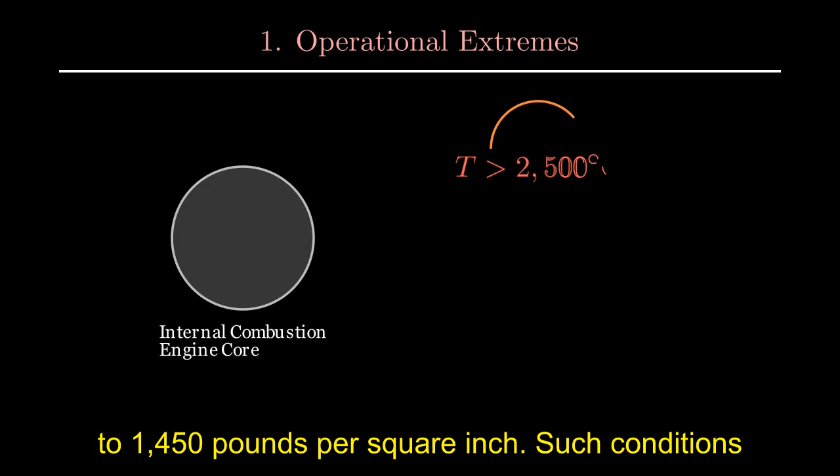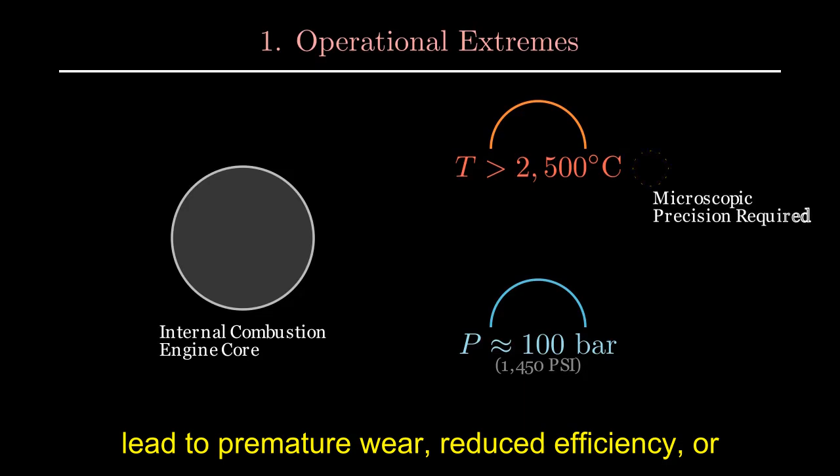The internal combustion engine, converting chemical energy into mechanical force, operates under extreme duress. Temperatures routinely exceed 2,500 degrees Celsius and pressures can reach 100 bar, equivalent to 1,450 pounds per square inch. Such conditions demand components engineered with microscopic precision. A deviation of even a few microns can lead to premature wear, reduced efficiency, or catastrophic mechanical failure. The inherent challenge lies in consistent, high-volume production, maintaining exacting tolerances across diverse manufacturing environments, day after day.

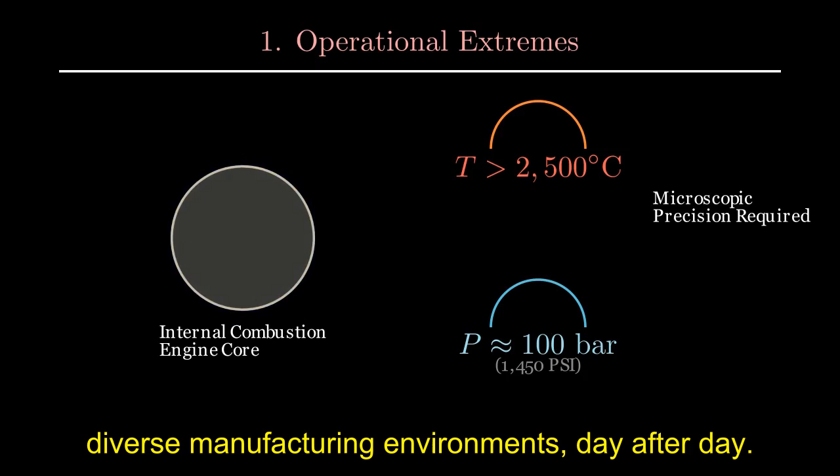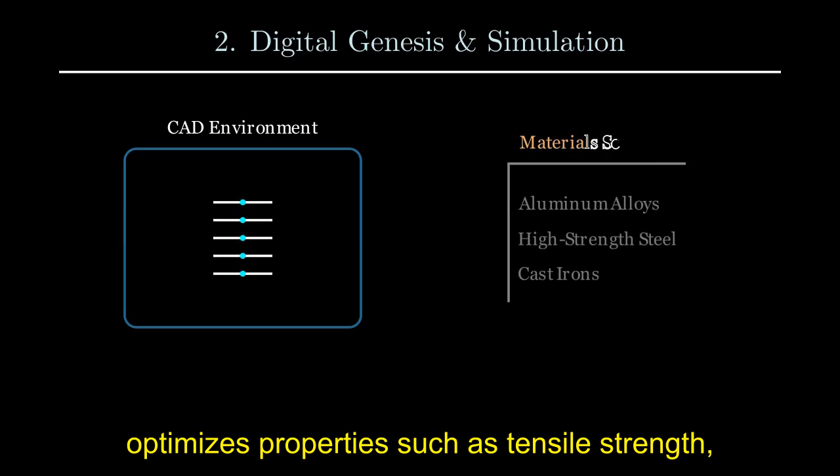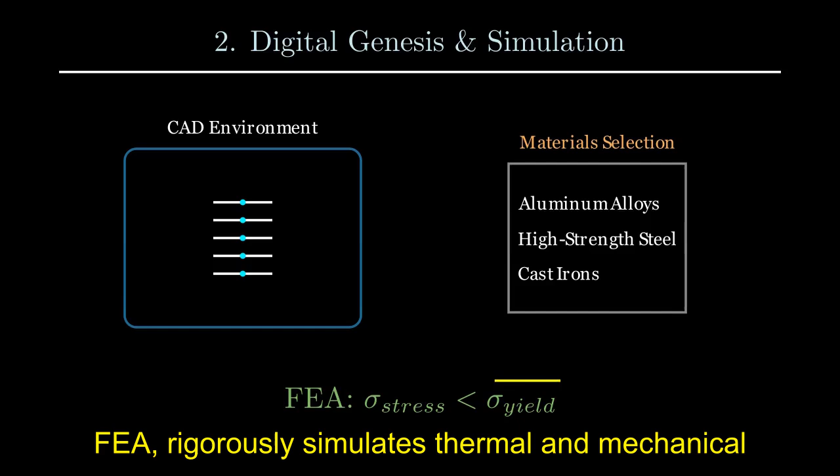The engine's existence begins digitally, long before any metal is shaped. Computer-aided design, or CAD, meticulously defines every geometric parameter of the engine block, crankshaft, and cylinder head. Material scientists perform exhaustive research, selecting specific aluminum alloys, high-strength steels, or advanced cast irons. This selection optimizes properties such as tensile strength, fatigue resistance, thermal conductivity, and overall weight reduction. Finite element analysis (FEA) rigorously simulates thermal and mechanical stresses, predicting performance and identifying potential failure points virtually, refining design before physical prototyping can begin.

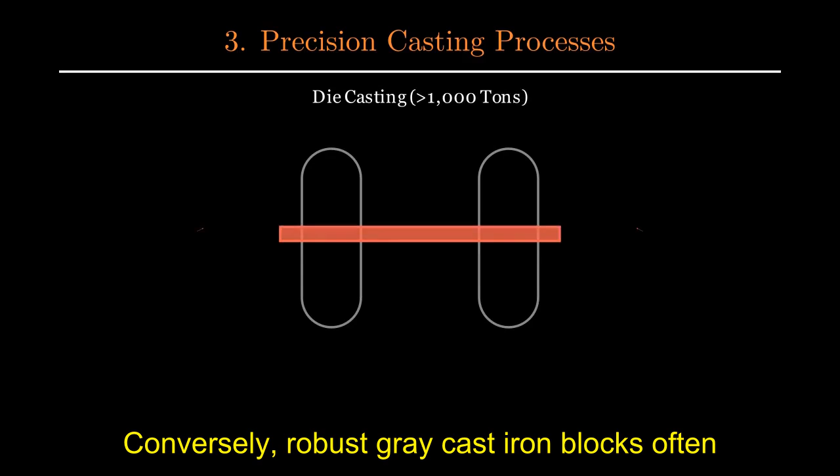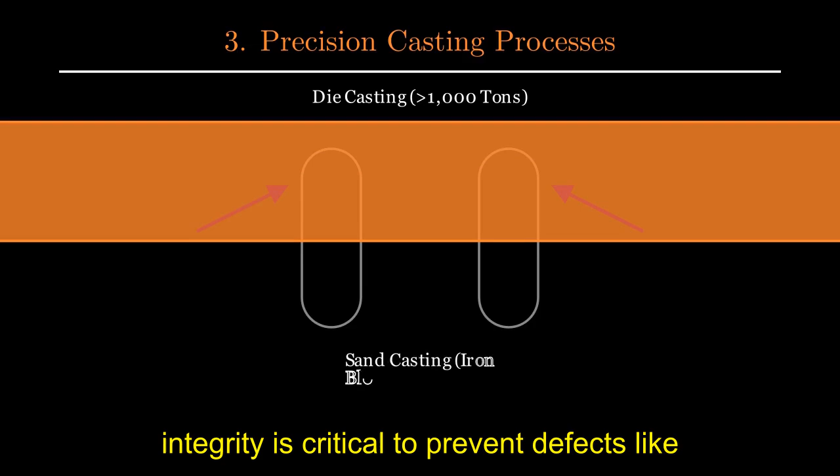The engine block, the primary structural component, typically involves precision casting. For lightweight aluminum blocks, high-pressure die casting is prevalent, injecting molten metal into elaborate steel molds under immense force, often exceeding 1,000 tons. This process facilitates complex internal geometries and thin wall sections, vital for mass optimization. Conversely, robust gray cast iron blocks often utilize sand casting, involving intricate sand cores to form internal passages. Precise control over molten metal temperature, injection speed, and mold integrity is critical to prevent defects like porosity, inclusions, or incomplete fills, which compromise structural integrity and performance.

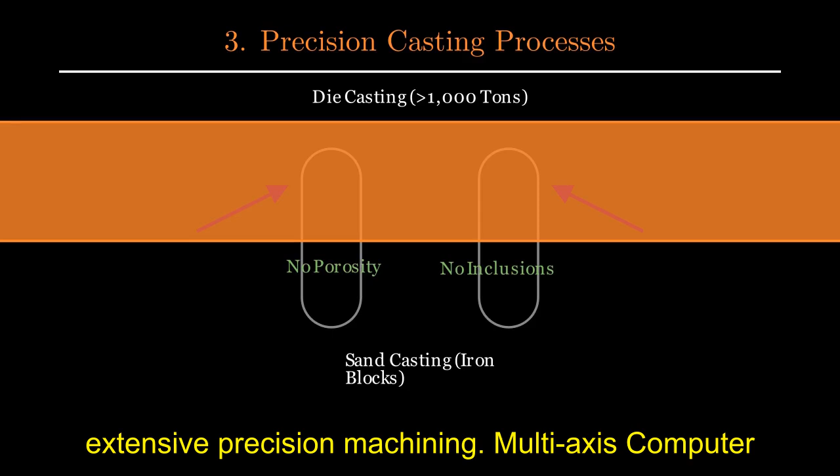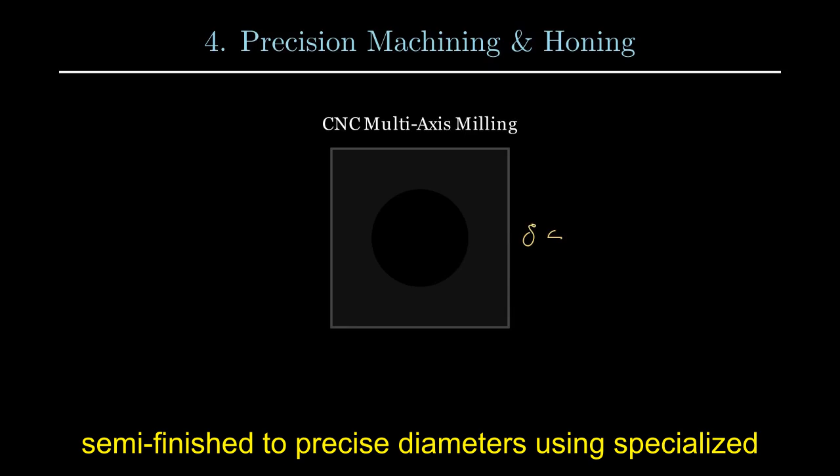Upon cooling, the cast engine block undergoes extensive precision machining. Multi-axis computer numerical control (CNC) machines perform intricate milling, boring, and drilling. Deck surfaces, where the cylinder head mounts, are milled to a flatness tolerance often within 5 to 10 microns, ensuring a perfect seal. Cylinder bores are roughed out, then semi-finished to precise diameters using specialized tooling. Robotic tool changers rapidly select from hundreds of cutting tools, executing complex sequences.

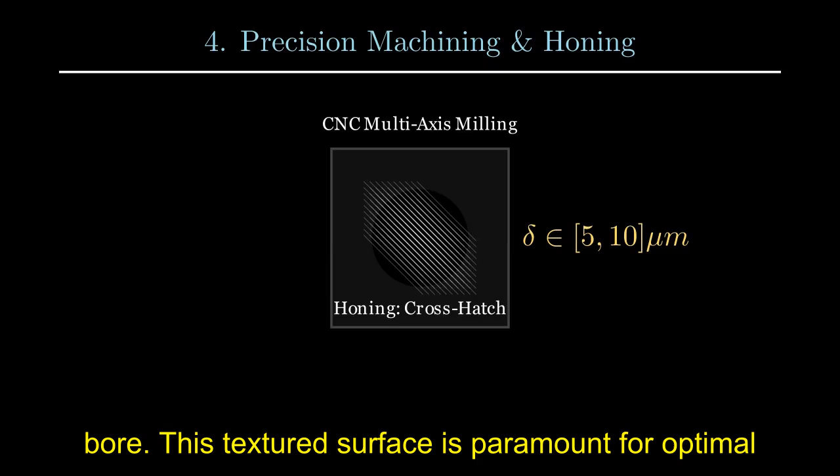Honing, the final process, creates a microscopic crosshatch pattern within each cylinder bore. This textured surface is paramount for optimal piston ring sealing, minimizing oil consumption, and ensuring long-term cylinder lubrication.

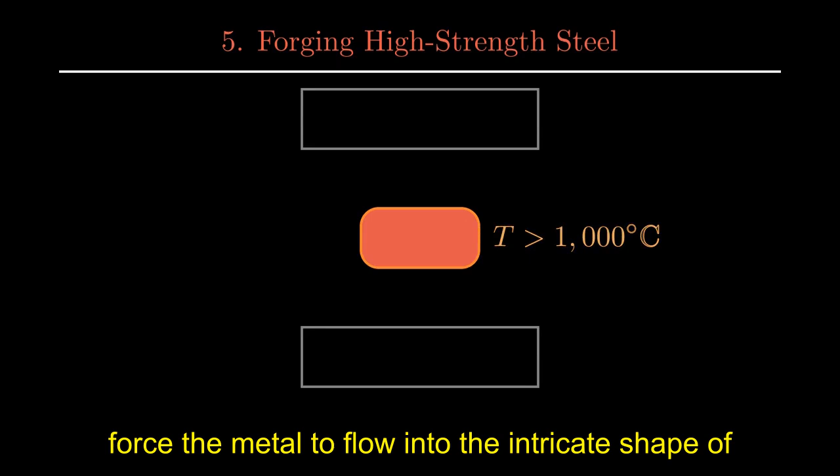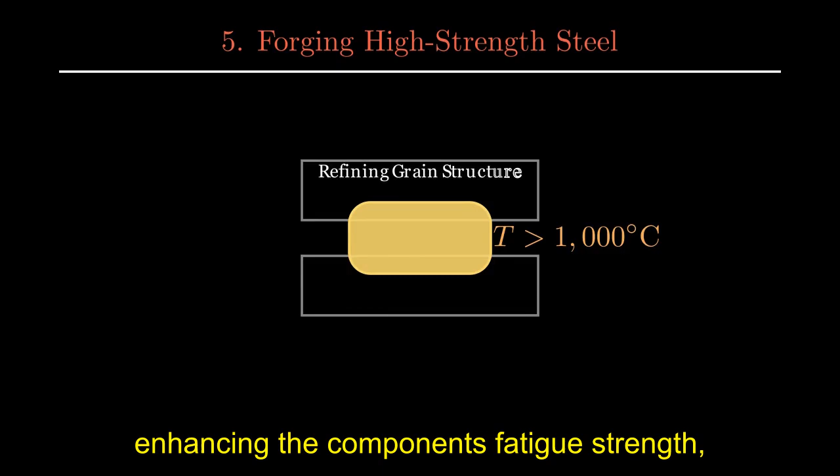The crankshaft, converting piston motion into rotational torque, must withstand enormous torsional and bending loads. It is almost universally forged from high-strength alloy steel. Heated steel billets, sometimes glowing orange at over 1,000 degrees Celsius, are strategically placed within massive hydraulic presses. Repeated, controlled impacts force the metal to flow into the intricate shape of the crankshaft. This forging process is crucial. It refines the internal grain structure of the steel, eliminating internal voids and significantly enhancing the component's fatigue strength, toughness, and overall impact resistance, properties essential for its sustained, high-stress operation.

Following forging, the crankshaft undergoes precise grinding and milling. Specialized grinding machines reduce main bearing journals and connecting rod journals to submicron tolerances, ensuring smooth rotation within the engine block. Oil passages are meticulously drilled through the shaft to lubricate bearings. Counterweights are then carefully machined to precisely balance the rotating assembly.

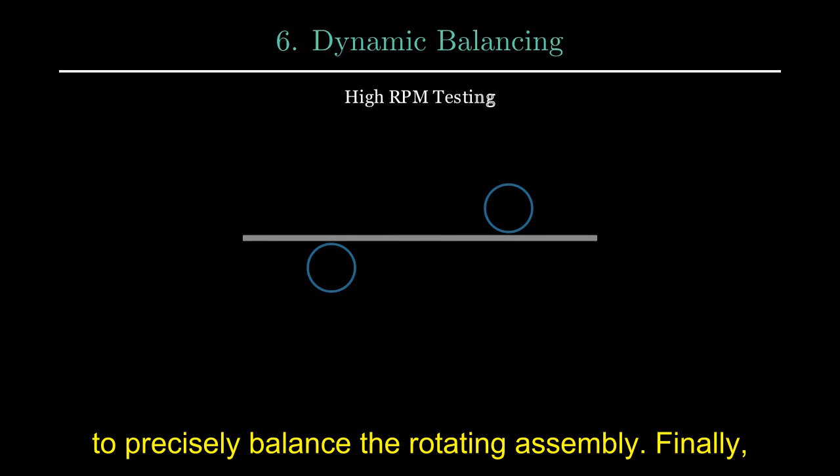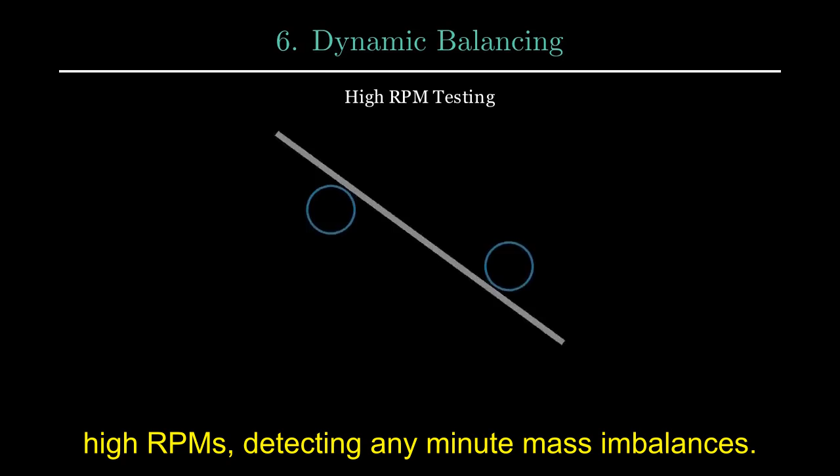Finally, each crankshaft is dynamically balanced on a dedicated machine. This machine spins the shaft at high RPMs, detecting any minute mass imbalances. Material is then precisely removed from specific counterweight locations to achieve perfect rotational equilibrium, which minimizes vibration and ensures smooth, long-term engine operation.

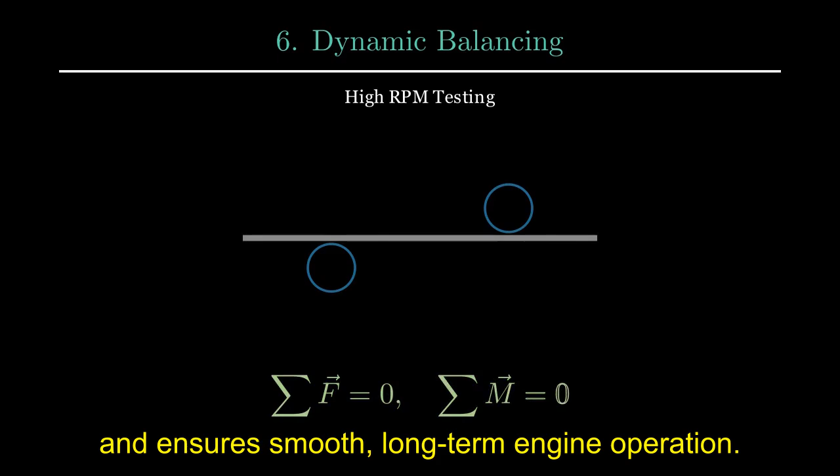Pistons, direct recipients of combustion pressure, are typically cast from lightweight aluminum alloys due to their excellent strength-to-weight ratio and superior thermal conductivity. Initial casting forms the basic cup shape, followed by extensive machining operations.

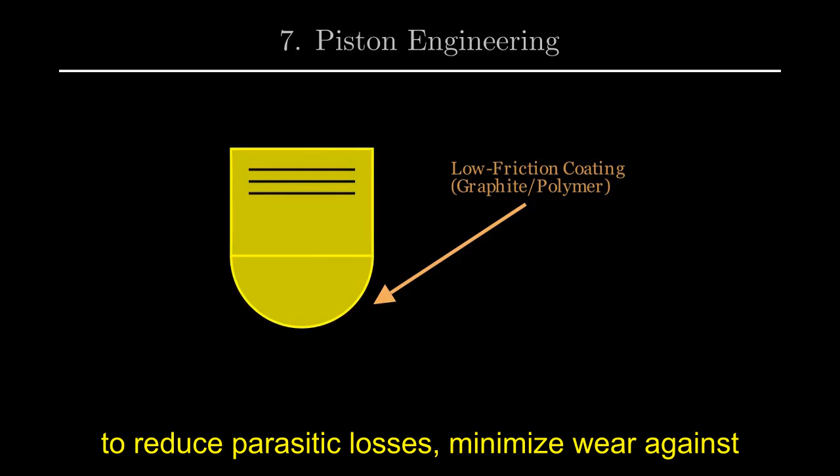Precision CNC machines create the critical ring grooves, ensuring piston rings can effectively seal the combustion chamber and manage oil. The piston pin bore is machined to an exact diameter for connecting rod attachment. Furthermore, the piston skirt often receives specialized low-friction coatings, such as graphite or polymer, to reduce parasitic losses, minimize wear against the cylinder wall, and reduce operational noise during engine cycling.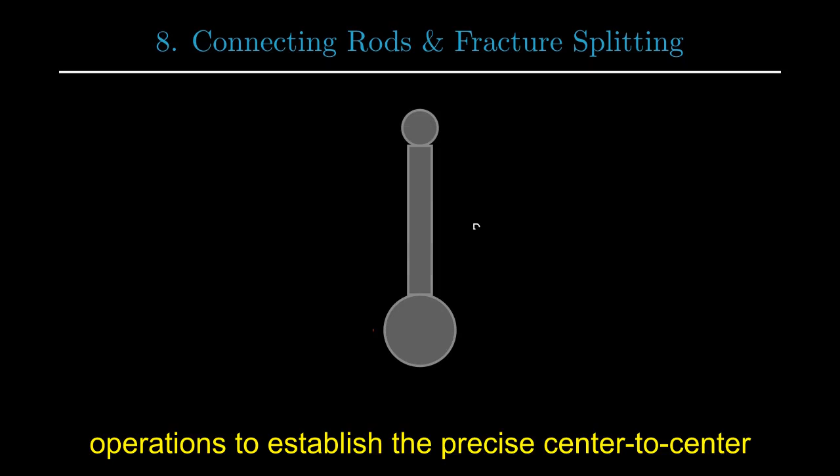Connecting rods serve as the vital link between the piston and the crankshaft, transmitting immense forces during combustion. Like crankshafts, these components are predominantly forged from high-strength steel to ensure necessary fatigue resistance and tensile strength. After forging, the rods undergo a series of machining operations to establish the precise center-to-center distance between the piston pin bore and the crankshaft big end bore.

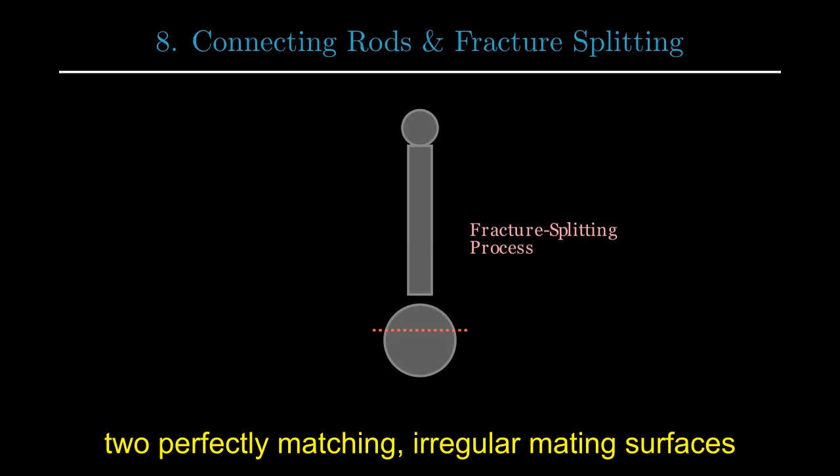Critically, the big end of the connecting rod is often crack split or fracture split during manufacturing. This creates two perfectly matching, irregular mating surfaces that, when bolted together around the crankshaft journal, ensure a highly accurate, strong, and precise connection without additional machining.

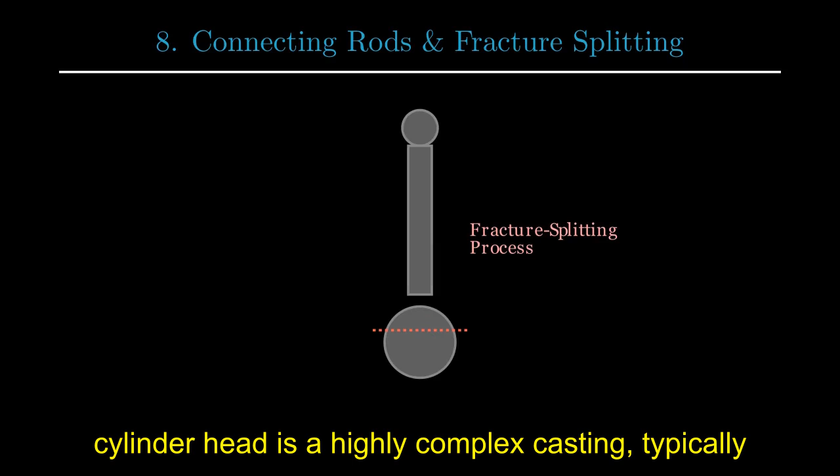The cylinder head is a highly complex casting, typically made from aluminum alloy, integrating intricate intake and exhaust ports, valve guides, and spark plug bosses. Precision machining operations are paramount here. The combustion chamber volume is meticulously shaped, and valve seats are milled to exacting concentricity and angle, ensuring a perfect, gas-tight seal when valves close.

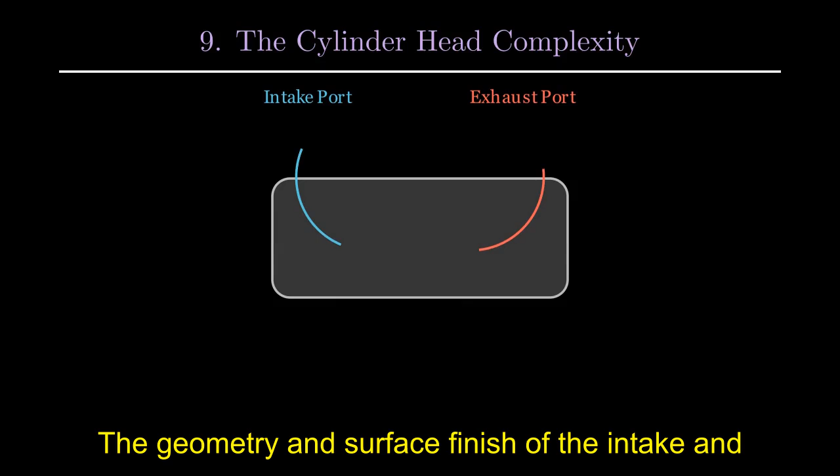Coolant passages and oil galleries are drilled with precision to manage thermal loads and lubrication. The geometry and surface finish of the intake and exhaust ports are carefully optimized to promote efficient gas flow, directly impacting an engine's volumetric efficiency, power output, and emissions compliance.

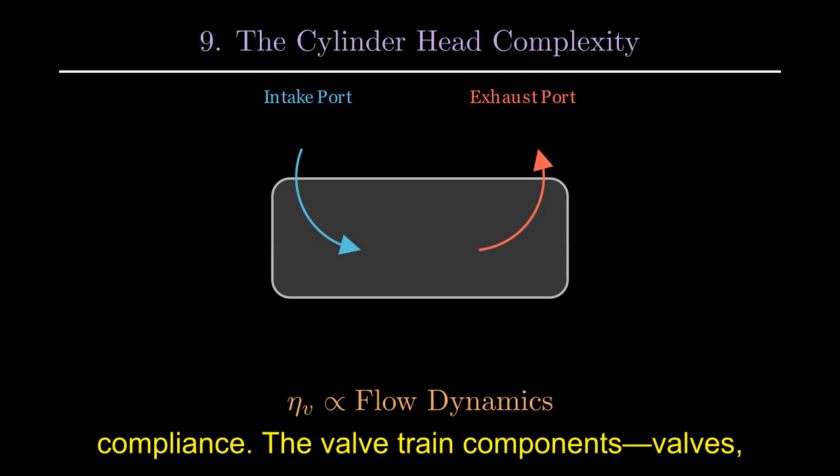The valve train components, valves, camshafts, and hydraulic or mechanical lifters, work in concert to precisely control timing and duration of gas exchange within the cylinders.

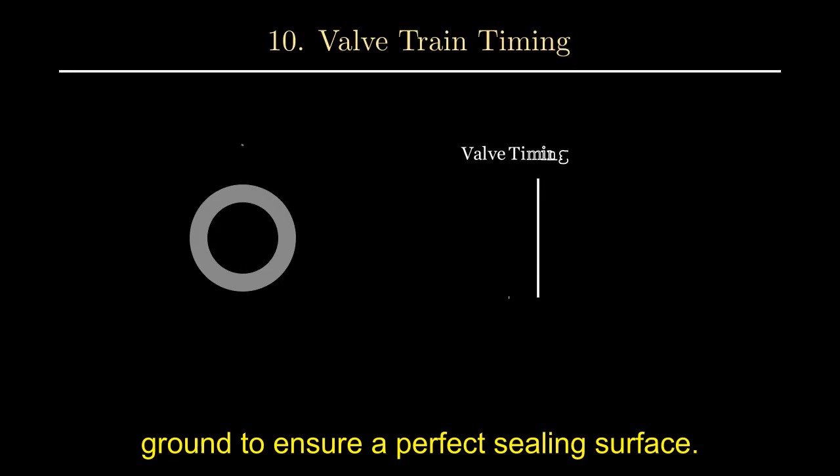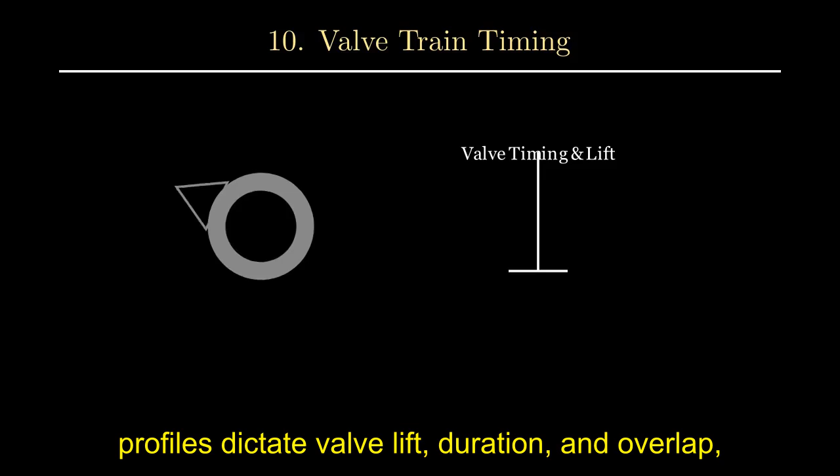Valves themselves are typically forged from high-temperature resistant alloys, then meticulously ground to ensure a perfect sealing surface. Camshafts, often cast or forged, feature lobes whose profiles are ground with extreme precision. These profiles dictate valve lift, duration, and overlap, critically influencing engine breathing characteristics across the entire RPM range. The accuracy of these profiles is fundamental to optimizing an engine's power, torque, and fuel efficiency.

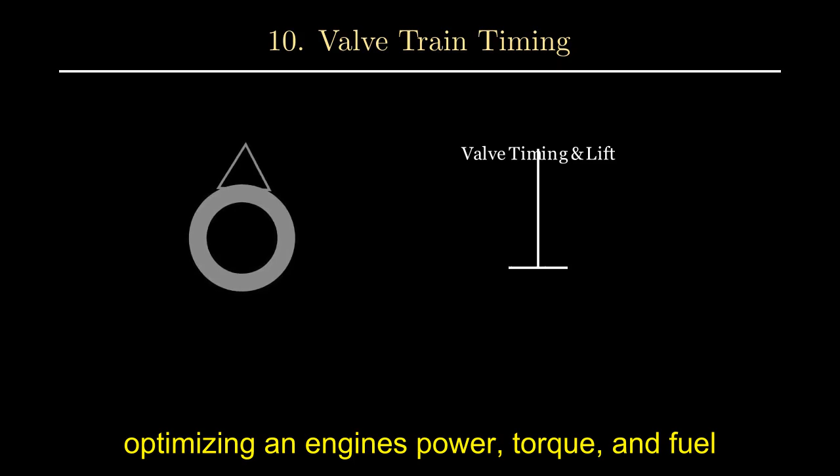Engine assembly commences with critical subassemblies. Piston rings, each with specific functions for sealing and oil control, are carefully installed into the piston grooves. Subsequently, the piston is connected to the connecting rod via a precisely fitted piston pin, often secured by circlips.

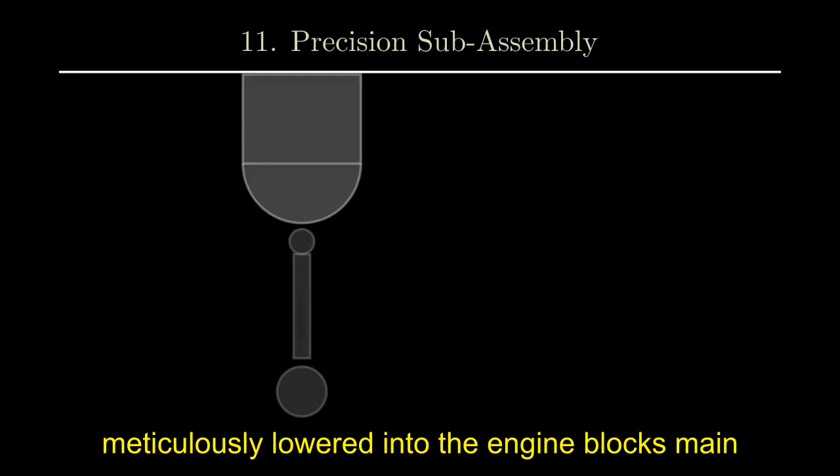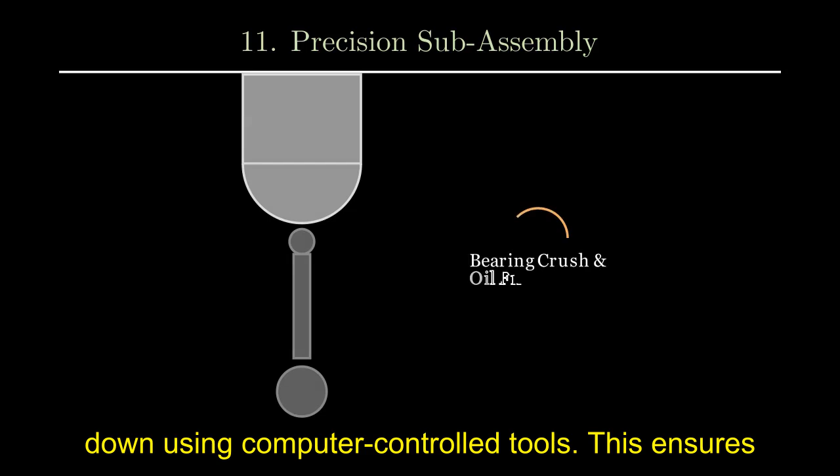Simultaneously, the crankshaft is meticulously lowered into the engine block's main bearing saddles. Precision machine main bearings, selected to exact clearance specifications, are installed before the main bearing caps are torqued down using computer-controlled tools. This ensures proper bearing crush and establishes the crucial oil film for crankshaft rotation with minimal friction.

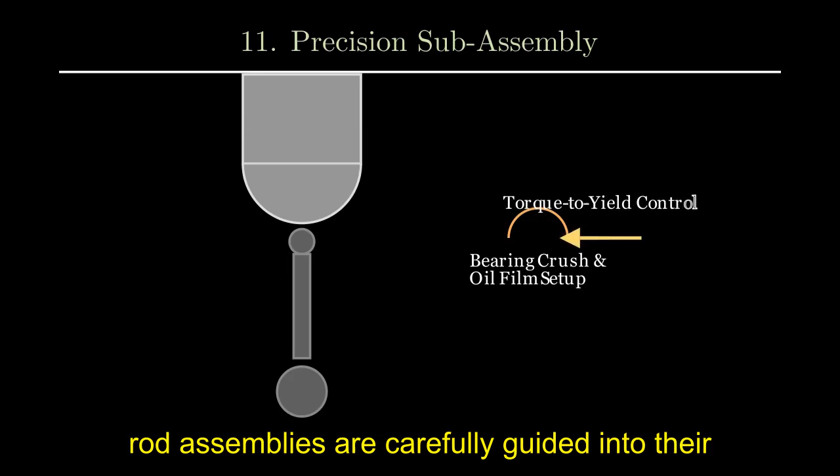With the crankshaft secured, piston and connecting rod assemblies are carefully guided into their respective cylinder bores. The connecting rod big ends are then precisely bolted around the crankshaft journals, again with specific torque sequences.

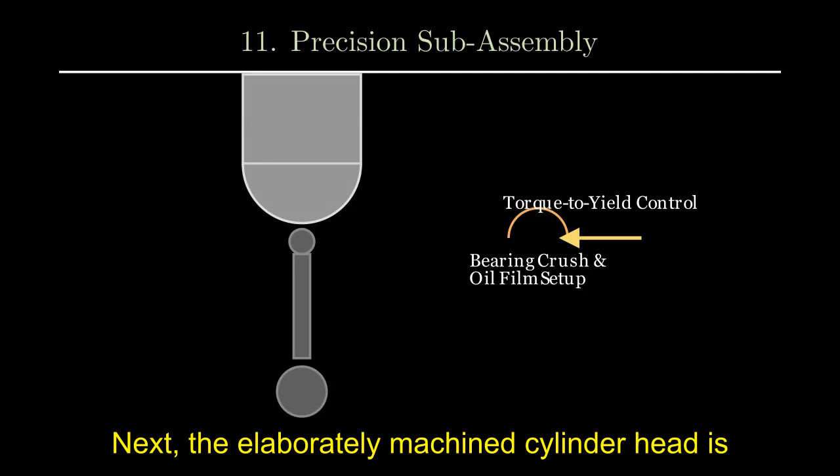Next, the elaborately machined cylinder head is cautiously lowered onto the engine block, guided by dowel pins to ensure perfect alignment. Head bolts, often of the torque-to-yield type, are tightened in a multi-stage sequence to achieve optimal clamping force.

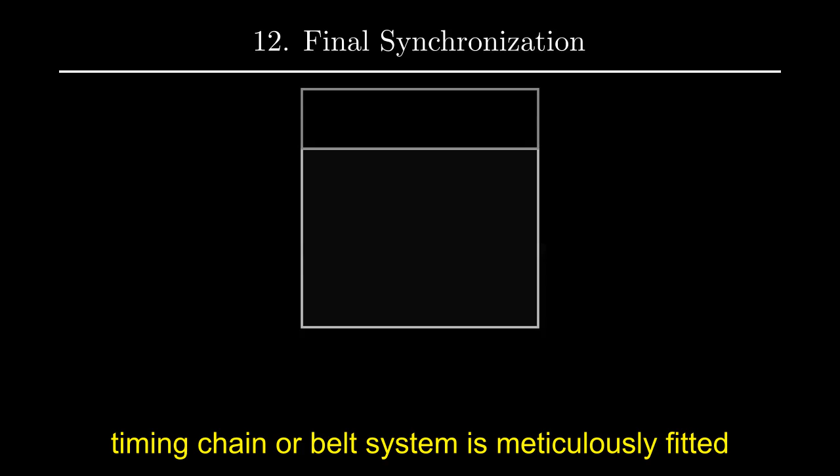Finally, camshafts are installed, and the timing chain or belt system is meticulously fitted and tensioned. This system precisely synchronizes crankshaft rotation with camshafts, ensuring valves open and close at exact moments relative to piston position for optimal combustion.

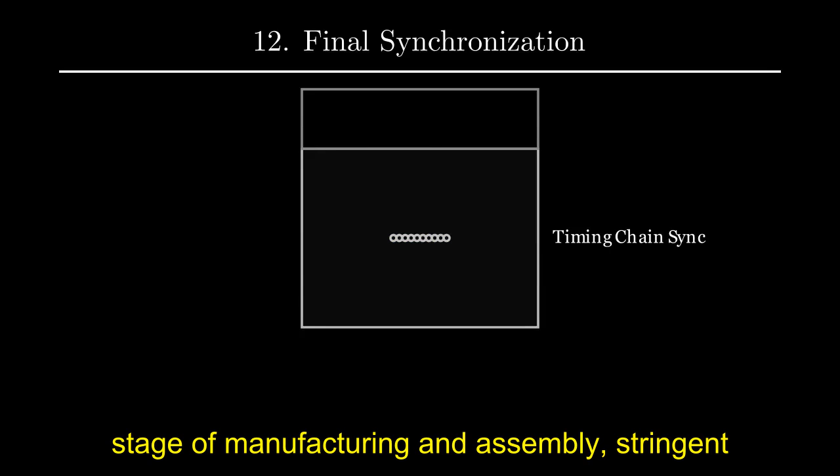Throughout every stage of manufacturing and assembly, stringent quality control protocols are rigorously applied. Automated optical inspection systems scrutinize component dimensions, surface finishes, and detect microscopic imperfections. Advanced coordinate measuring machines verify critical tolerances.

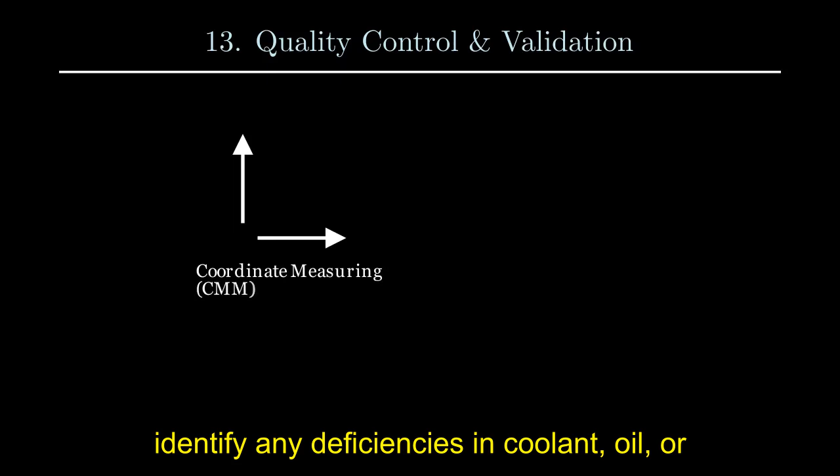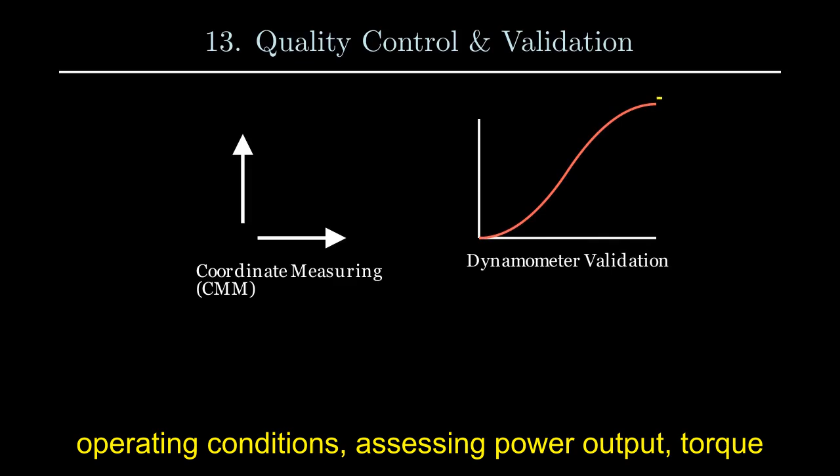Post-assembly, engines undergo leak tests, utilizing pressurized air or inert gases like helium to identify any deficiencies in coolant, oil, or combustion chamber sealing. The ultimate validation occurs on a dynamometer, where each assembled engine undergoes hot and cold tests. These simulate various operating conditions, assessing power output, torque delivery, fuel consumption, and emissions compliance before an engine is deemed ready for vehicle installation.

The modern internal combustion engine functions symbiotically with its electronic control unit, or ECU. During final manufacturing stages, a complex array of sensors are precisely integrated. These include sensors for oxygen levels in the exhaust, manifold absolute pressure, crankshaft and camshaft position, engine coolant temperature, and throttle position. Each sensor provides real-time data to the ECU.

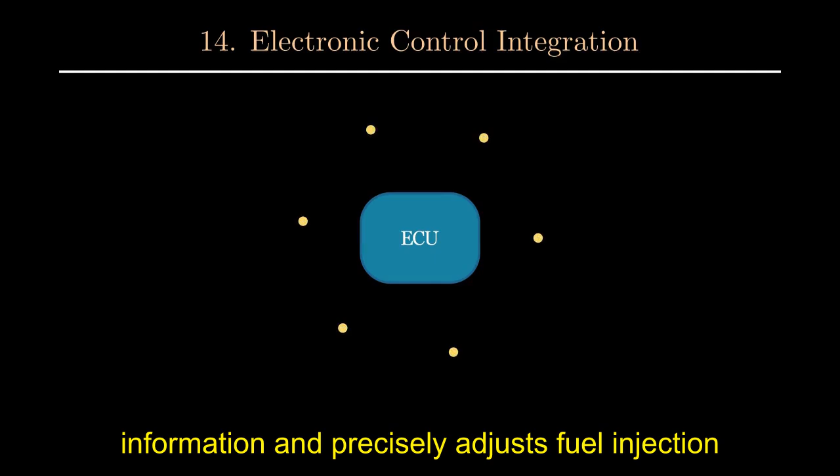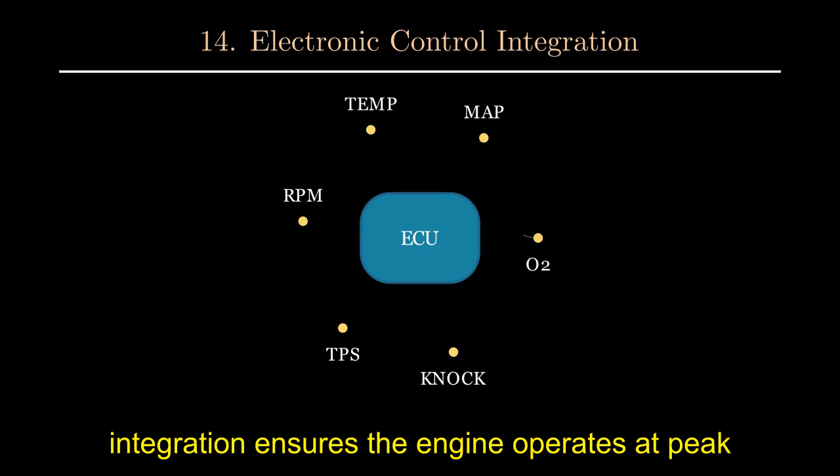The ECU, in turn, processes this information and precisely adjusts fuel injection timing and duration, ignition advance, and in many cases, variable valve timing. This sophisticated integration ensures the engine operates at peak efficiency, minimizes emissions, and delivers optimal performance across all operating parameters.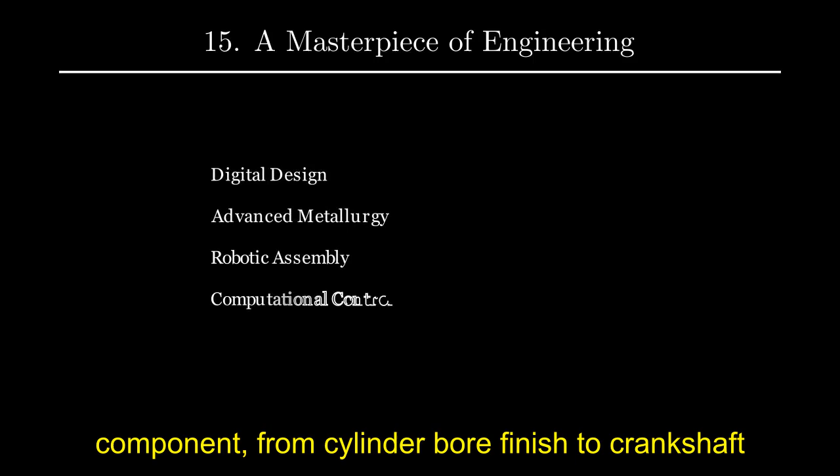From initial digital blueprint to final dynamometer test, car engine manufacturing represents a profound testament to precision engineering, advanced metallurgy, and sophisticated automation. Every component, from cylinder bore finish to crankshaft balance, results from relentless optimization and exacting production standards.

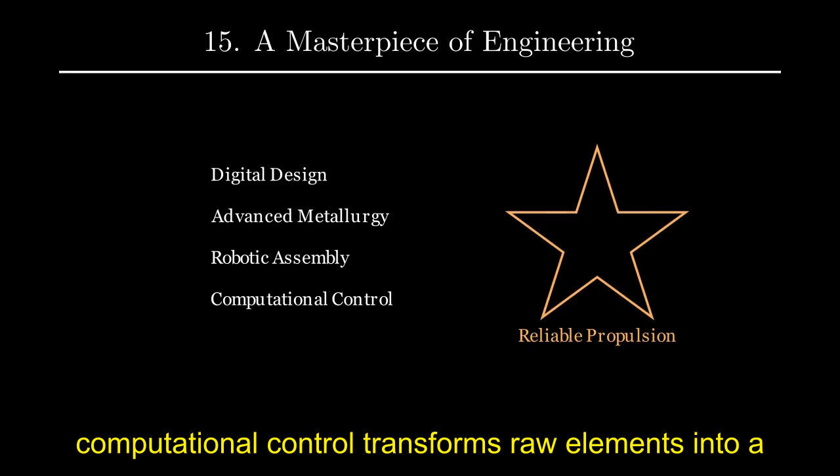This intricate dance of materials science, robotic assembly, and computational control transforms raw elements into a robust and efficient power unit, capable of reliably propelling vehicles across vast distances under diverse conditions. It is a true marvel of industrial capability.